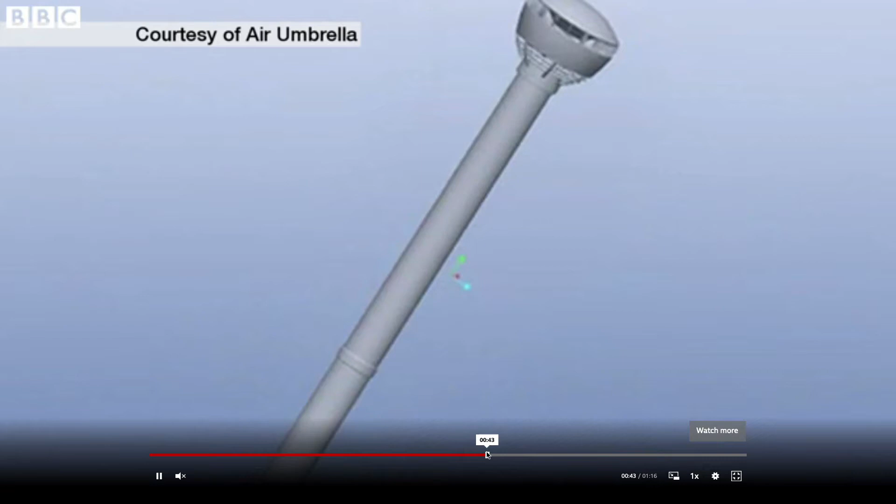Not really pipe flow, but interesting enough, I guess, related to other flows: the idea that you can make an umbrella just by having a jet of air that goes above your head and keeps all the drops of rain from hitting you on the head. I guess you have to make sure you have batteries for it to work, but I'm not sure why I put that in. I just thought it was kind of interesting at the time.

What else we got? Oh yeah, a bit of death and disaster. This was from a few years ago, I'm not sure if it says the date here. San Bruno, just near San Francisco Airport in California. Obviously all the gas supplied to us is on pipelines, talking about pipe flow. So you want to make sure those pipes actually have some integrity to them and they don't weaken.

Everyone talks now about, instead of natural gas, the hydrogen economy - the idea that you could generate hydrogen by electrolysis from wind power or PV cells generating electricity, split water into hydrogen and oxygen, use the hydrogen, burn it or use it in fuel cells. And of course, you can use all the infrastructure that's in place for natural gas, except hydrogen has a problem of embrittlement, in that it's such a small molecule that it gets into steel and tends to fracture it easily. This was an explosion in a neighborhood from a gas pipeline, which is underground, which ruptured and maybe killed a couple of people.

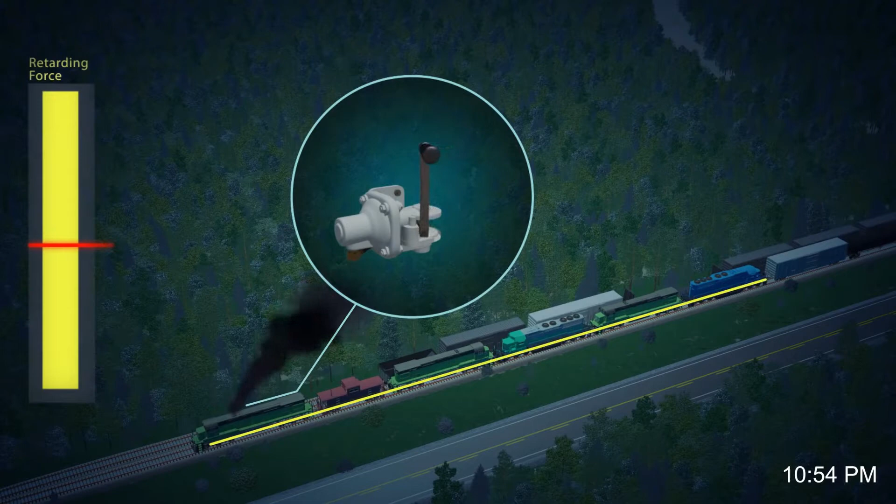You've probably heard, certainly in your lifetime, in the recent past, it was the Biden administration who killed it - the XL pipeline, which was supposed to go through Nebraska, through the Midwest. The idea was it was a big push by the Canadian government because in Western Canada they have tar sands in Western Alberta, just on the east side of the Rockies. These are kind of unconventional oils - it's like bitumen, almost like the tarmac asphalt you put on the road.

It's so thick that to get it out of the ground, typically you use what's called SAGD - steam-assisted gravity drainage. You pump in steam, you warm up these shallow sands, probably 10 or 15 or 50 meters deep, no deeper than that. The heat reduces the viscosity of the bitumen, so it flows by gravity under its own weight in the pore space. You gather it, take it out, and then refine it.

The XL pipeline was due to be able to take all of that oil down to the Gulf Coast, to refineries, through central U.S. It's relatively heavy, carbon-wise - called a dirty oil in terms of its carbon footprint. High carbon to get it out, because you have to use energy to get it out, heat up water to pump in as steam, and once you do get it out, it's quite heavy oil in terms of carbon. Methane is CH4, so 4 hydrogens to every carbon - these oils are much less.

We talked before about these oil containers, these tankers, which have flared ends, in the context of having them so that when you accelerate, the oil or fluid in it can move to the top, and it doesn't pop the cap off the top of the tank.

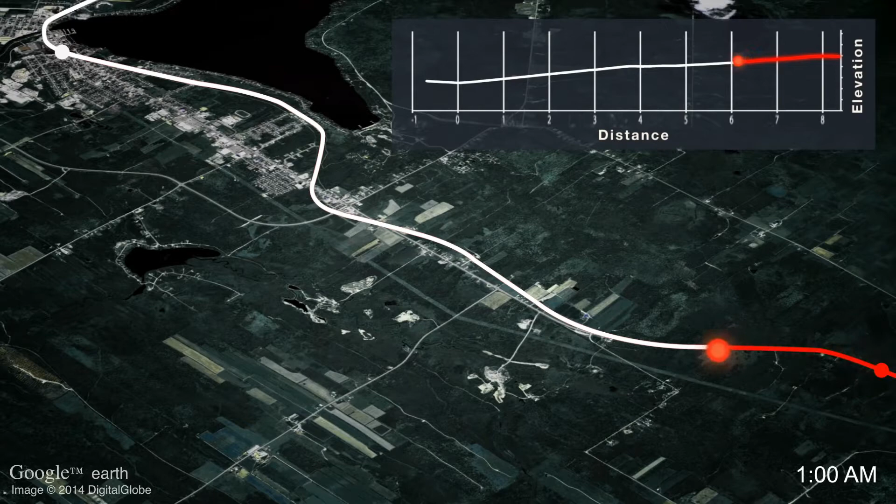The XL pipeline is about sending oil by pipeline instead of by tanker. Even though we showed exploding pipelines before, exploding pipelines are probably safer than taking oil through neighborhoods by rail.

This was a tragedy called Lac-Mégantic in Quebec. A train carrying a number of cars, basically an oil train, maybe coming from the Bakken in North Dakota or Western Canada, full of tankers, was parked outside the town of Lac-Mégantic at nighttime. It wasn't secured properly, the brakes came off, did whatever, and then it ran into the town.

It killed 47 people who were up late at night at the one bar in town or whatever, as it derailed. So the theme of our class, we're veering off it a little bit, but pipelines are what link up the country for hydrocarbons, for gas.

When you turn your stuff on, I guess this is a picture of it the next day. No, I won't replay it.

The point is that pipelines are used in everything that we do. They're in use for the stuff we have in our houses. They bring natural gas into houses and hospitals and buildings, etc. They're part of pretty much our everyday life.

They're even part of the jet lev, right? The jet lev has a pump, sits on the water, the umbilical comes up into the back of the person, and then squirts down either side. That's essentially pipe flow. And of course, the essence of pipe flow is what we talked about last time.

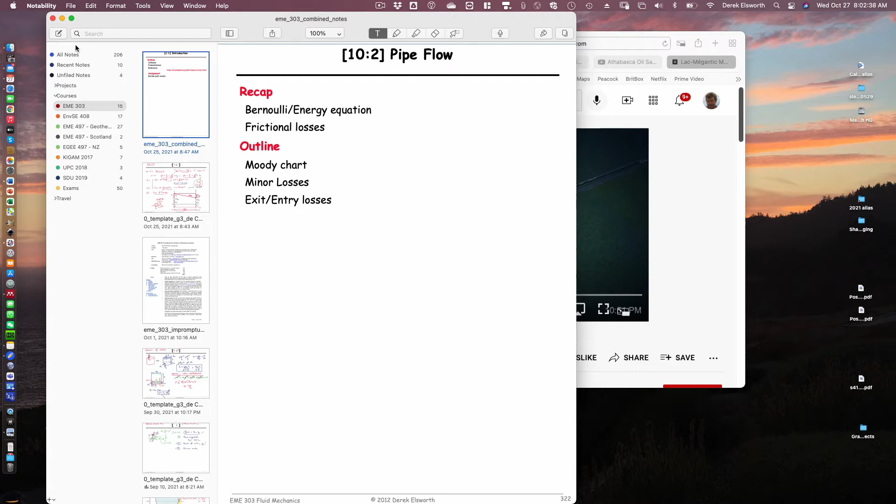So that's kind of the intro to where we are for today. Important in terms of what we're dealing with. Let me get set up here.

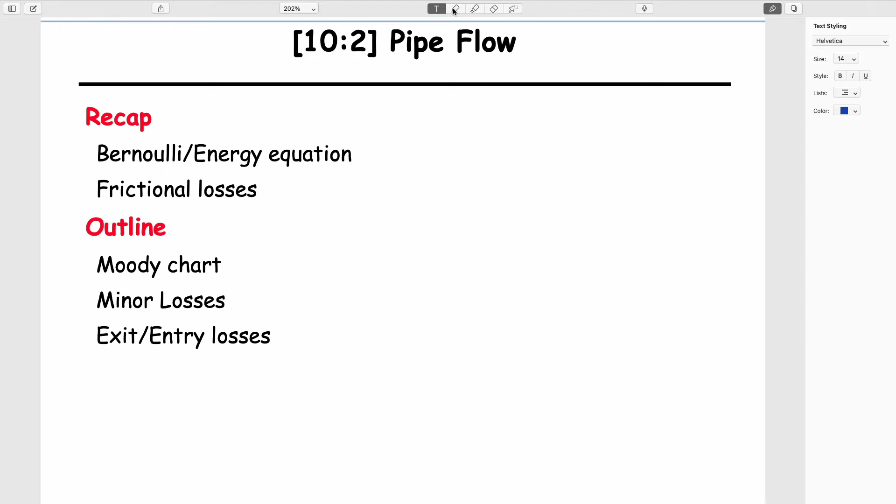So I thought we would do these things today for 10-2, since we're on schedule.

Initially, just re-discuss what we've seen many times before, the Bernoulli/energy equation. The energy equation is just the Bernoulli equation plus the pump heads for pumping and the head losses for frictional losses. We'll talk about what frictional losses are, we've already talked about them a little bit.

And then talk about these three things: the Moody chart, which is nothing other than the chart we alluded to before, which is the essence of pipe flow. We'll try to get to that and talk about minor losses, which are losses within fittings, going around bends, and entry and exit losses.

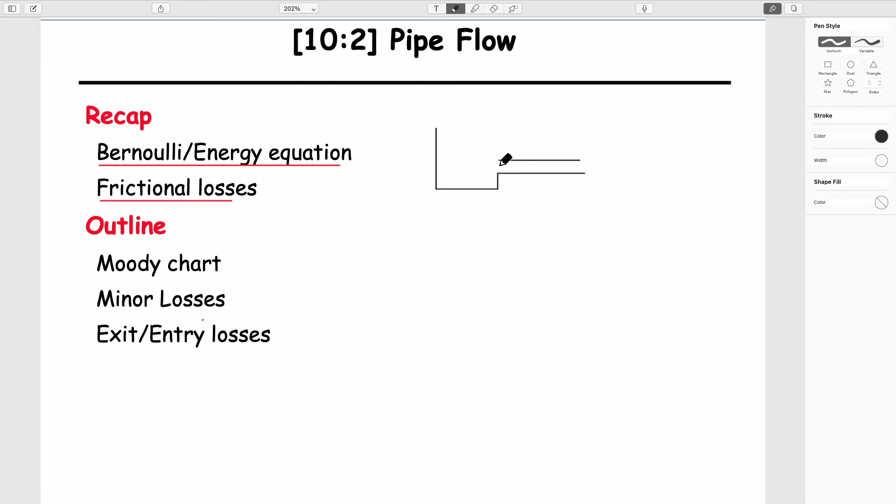But I think we'll spend most of our time talking about rationalizing the energy equation. I'm not sure, perhaps maybe I should draw something. So if you took a kind of fake geometry that we might want to play around with, that involves pipe flow between two tanks, it looks something like this.

And those two tanks maybe are at different water elevations. Not supposed to be sloping, right? And I guess it should connect up at the top. So this would be a point here, and then this would be a point here.

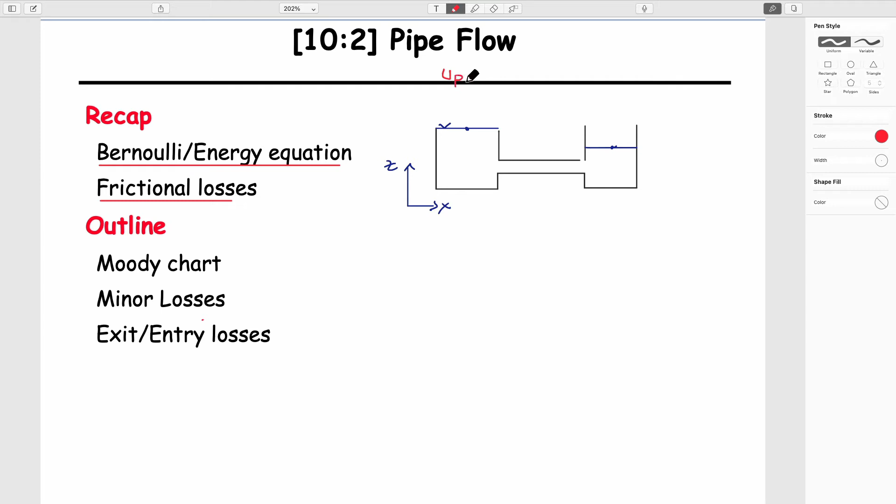We can draw our coordinate system in it. Z is always positive upwards. And I guess we could define an expression which goes from the upstream side — so this is upstream, obviously — to downstream, because of the water elevations.

And the expression for that would be something like this, you've seen it many times: elevation head, pressure head, velocity head, the pump head on the left-hand side is equal to Z2 plus P2 over unit weight of the fluid plus velocity squared 2 over 2g.

And I suppose we could add on also the sum of the head losses. Just to remind ourselves, we've always defined pump heads in terms of something that looks like this.

It's equal to — probably unfortunate units, but this is rate of doing work, so this is power divided by density times volumetric flow times gravity. So these two terms together would be what we've called in the past mass flow rate, right? Density times volumetric flow rate.

And we've also, although we've never really derived it, but we'll get there today, talked about these head losses. We can talk about what we'll call major losses, which are defined by some parameter — a friction factor — times length of the pipe over its diameter, times the velocity head.

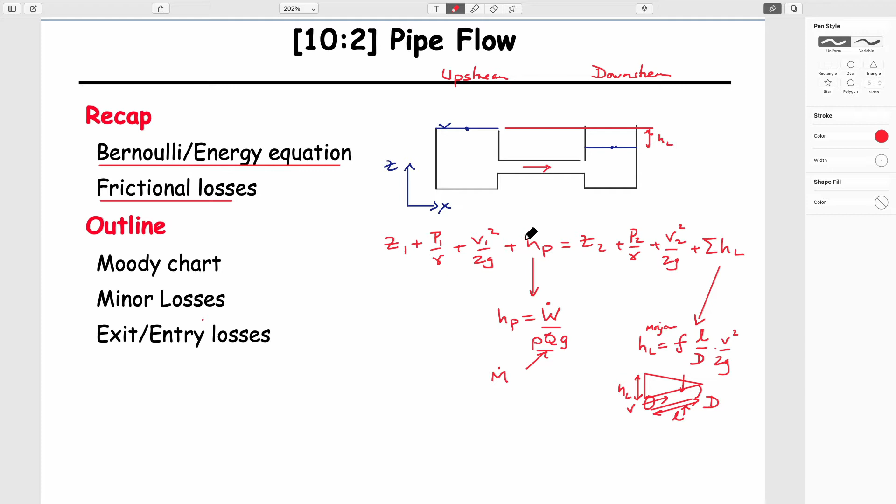It doesn't have this term on it, because it's not that term. It's actually the velocity that would be in this pipe in which the loss occurs. And clearly, if you go across from here, this would also be the head loss between upstream and downstream, physically what it is. And so this is what we'll call the major losses.

Just to finish it off, let's talk about the minor losses. This is a summation of all of them. The minor losses we've already seen once before: it's this coefficient between 0 and 1, times v squared over 2g, again the velocity within the fitting. This would be for things like bends in pipes, with some defined velocity within the system. So these are the two losses that we have, and they'll always look something like this.

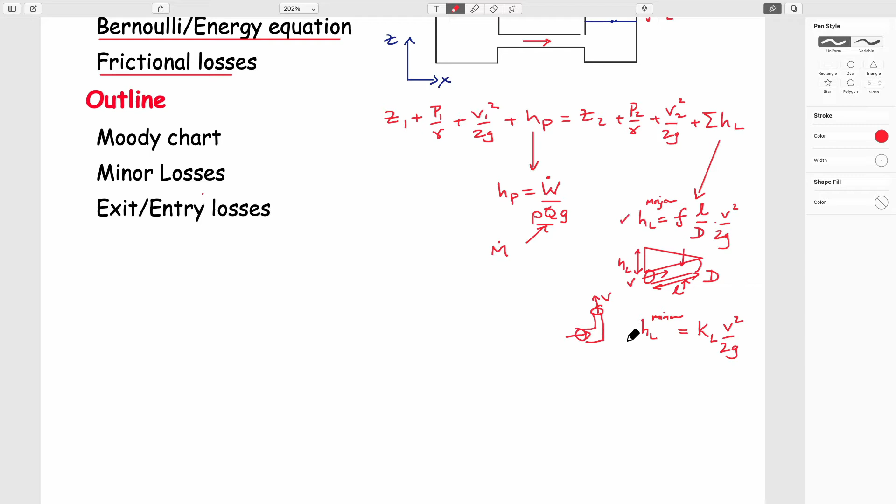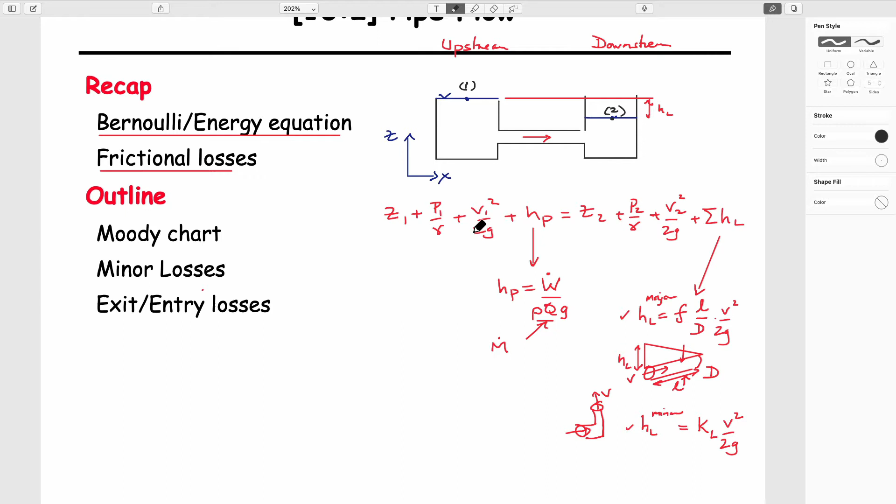So when we're solving this, I guess what we could do is we could typically write this easily as 1 and 2. Those would be our locations. And so if we deal with those, the differences in elevations wouldn't cancel out.

But these would be at atmospheric pressures, so this would be 0, and this would be 0. These would be big tanks, so this would be 0, and this would be 0. And if there's no pump in our system, so this is 0, then the difference between the head losses is just going to be Z1 minus Z2 equals sum of HL.

So I kind of jumped to that by drawing this, but that's exactly what this is, right? That doesn't help us very much, because it just tells us that the head loss is equal to the difference in elevation. So if we wanted to figure out exactly what the head loss was within the system, instead we could write the behavior at each of these two points here, and we could call those 3 and 4.

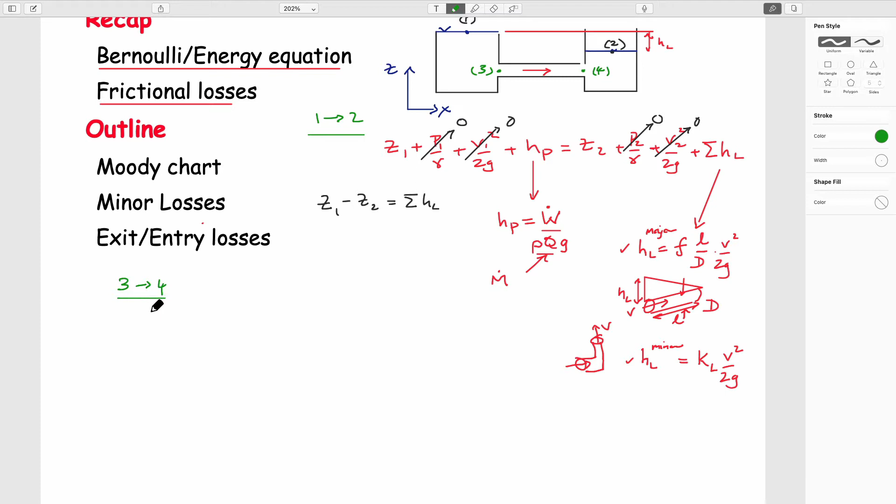So this one was between 1 to 2. Now if we write it 3 to 4, then I guess I could write this equation out. Well, why not? I can do it much better than that. If you're rushing to write this, I guess it removes it from there, but I guess you don't need it.

It's recorded somehow, so we could look at what these individual components are without me now writing it. I just need to change it slightly for the fact that now the suffixes wouldn't be 1, 1, 1, and 2, 2, 2, so you see where we're going with this, hopefully. They would be, upstream would be 3, and downstream would be 4. Yes, I can tidy it up again and then talk about what these individual components would be.

So what do we have now? Elevations of these two, well, they're kind of on the same level, so elevations would be the same. So this and this would drop out, not because they're 0, but because they're the same as each other. The velocities, if it's the same diameter pipe at both ends, then these would also cancel out, not because they're 0, but because they're the same as each other.

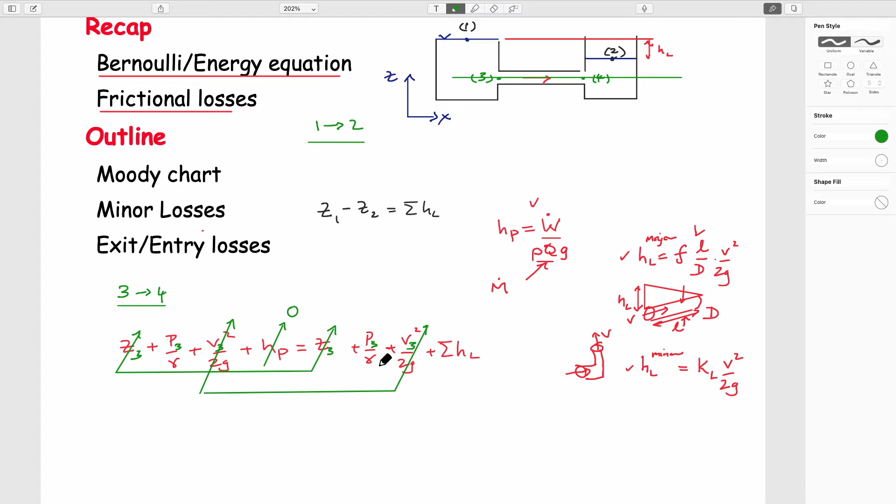We're assuming that there's no pump in the system, so that's 0. And now the differences between them would be that—okay, so you didn't correct me, but of course it's wrong. These should be 4s, right?

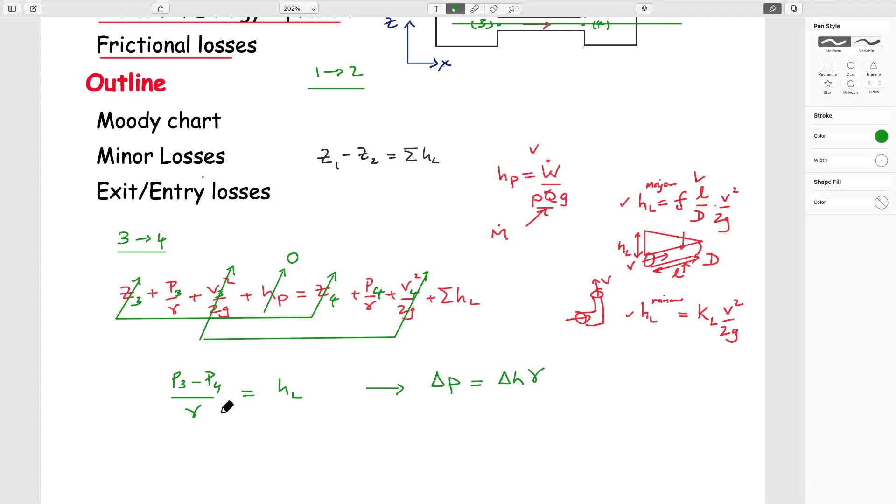And so now, P3 minus P4 over unit weight is equal to the head loss. We kind of know that from our unit conversions that the change in pressure is equal to the change in head multiplied by unit weight. We can just get that from this: delta P, delta H, this is a delta. And so physically, really, that's what it is.

If we draw the pressure as an elevation, a height of water that would rise up in a pipe above this, then this is really going from this magnitude to this magnitude downstream, and this is just the head loss. And so we can always define the head losses in terms of that, and that's the typical system that we'll deal with.

You'll note, of course, that if we have Bernoulli and the head loss is 0, then there can't be a drop between these, right? We can't sustain it. You can think of that in terms of: if the viscous losses on the pipe are 0, that's like the pipe being really, really big, which is like the tank being really, really big. This, instead of being a pipe, is just a continuation of the tank.

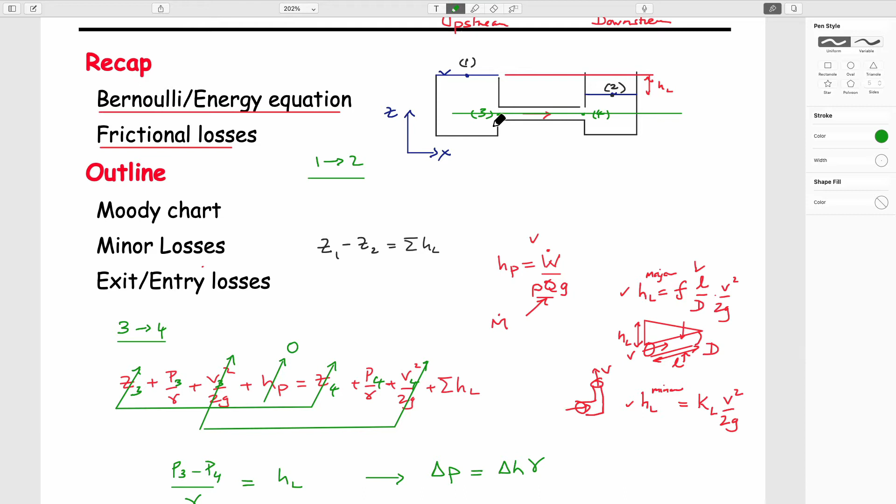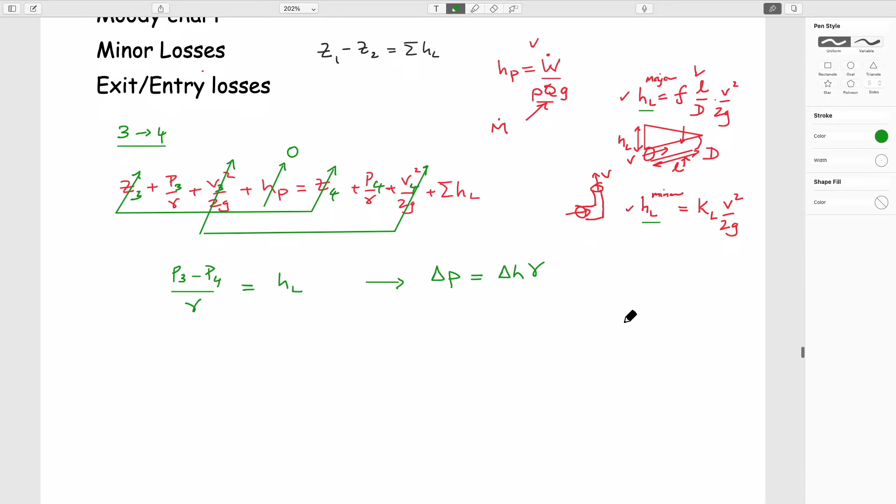And of course, in a single tank, you can't have 2 different elevations unless it's accelerating somehow. So Bernoulli wouldn't allow these elevations to be different, because the essence of pipe flow is that we're losing some energy as it flows from upstream to downstream, and it's these frictional losses that occur along the way. So the essence of pipe flow is being able to figure out exactly what these magnitudes of head losses are. We should spend some time figuring out exactly what that means.

The easiest way to do that is to think about what we didn't really do last week, but what was on the cards for last week, which was dimensional analysis. It's dimensional analysis, but it uses dimensionless coefficients.

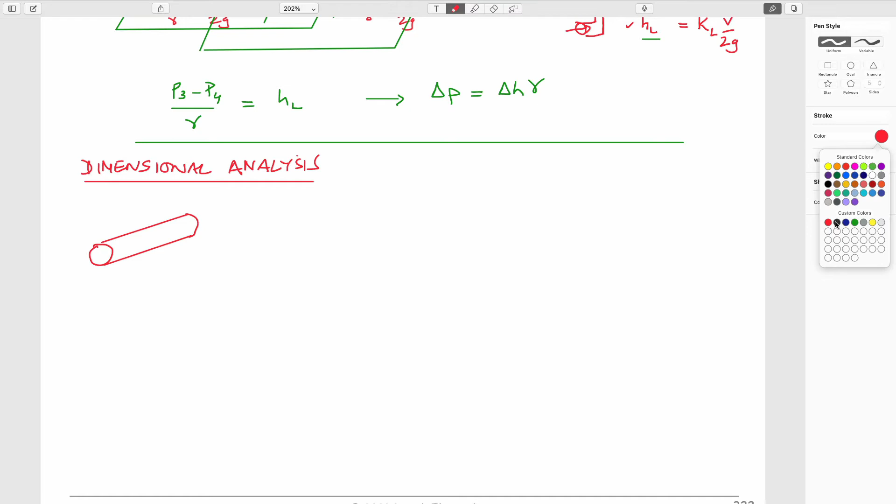This just says that what we can do is we can analyze, say, flow within a pipe. So our flow within a pipe would be defined in terms of the features of that pipe that describe the flow. We can imagine the features would be the velocity at which the fluid flows, the pressure drop that occurs along the pipe, delta P, the length, and the diameter, the internal diameter, since we're interested in flow.

We said last time that we might be interested in some roughness. So roughness, let me draw it larger: roughness would be epsilon, the magnitude of this, which equals roughness, Greek E, in other words, roughness. And I guess a couple of different properties of the fluid, which would be the density and the viscosity.

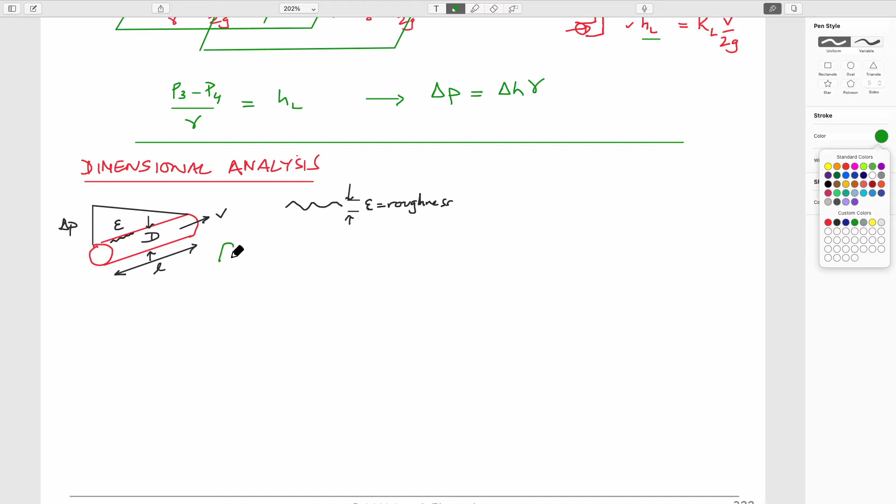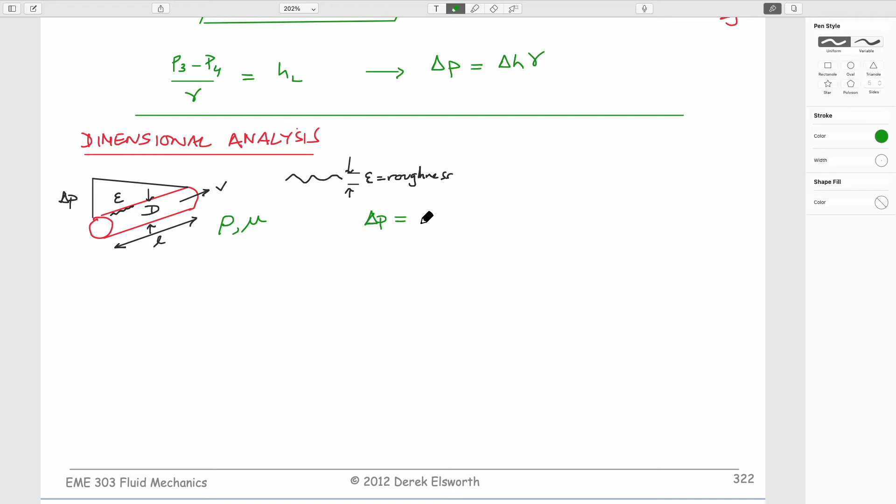So what we could write from this is that the pressure drop that we have in the system is some friction factor, a constant function of the density, the viscosity, the velocity, the length, the diameter, and the roughness. So this is 1, 2, 3, 4, 5, 6, 7. This gives us 7 terms.

We know that from Buckingham pi, the number of dimensionless terms is equal to, I think we call it, k minus n. K are the number of terms, which are 7 in this particular case. N is the number of mass, length, or time dimensions that are mentioned. I guess this could also be temperature, but we don't have temperature in this, so we won't worry about that. Mass: density is mass per unit volume, so mass is certainly in there. Length, certainly in there. And velocity is meters per second, so each of these 3 are represented. So this would be equal to 7 minus 3, which is equal to 4.

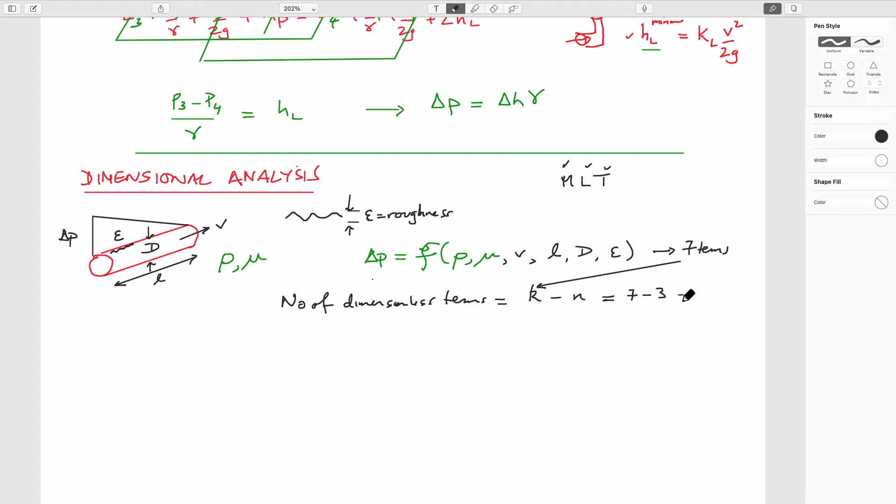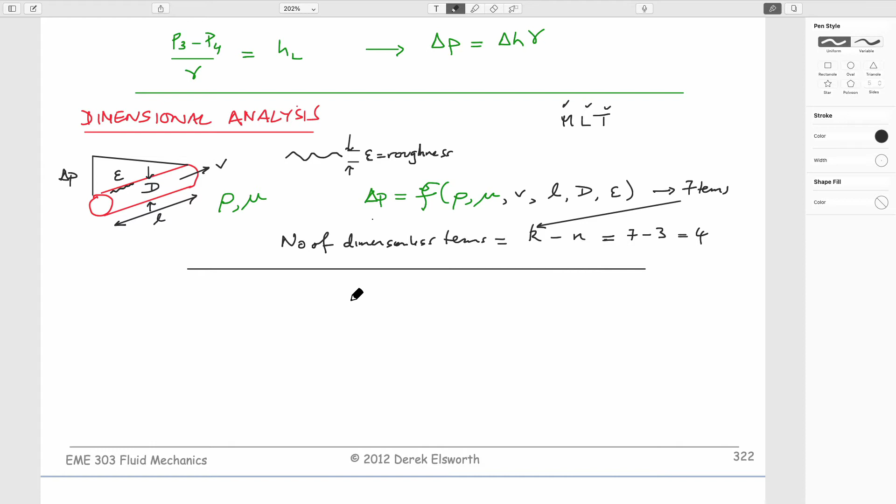So maybe it could be a scaled model, or certainly we could use a real pipe in our calculations because it's not so big. Kinematically, the flow regime in that pipe has to be identical to the flow regime.

It's not so obvious within a pipe, but we use this idea that if you flow around a sphere or a cylinder, if you flow very slowly, it's kind of a creeping flow that hugs the cylinder. If you flow much quicker, it's this flow that breaks off in the downstream portion, and you get lots of vortices. These are the vortices that give the Tacoma Narrows Bridge shedding from the top of the deck and then the bottom of the deck. Alternately, it gives it this oomph.

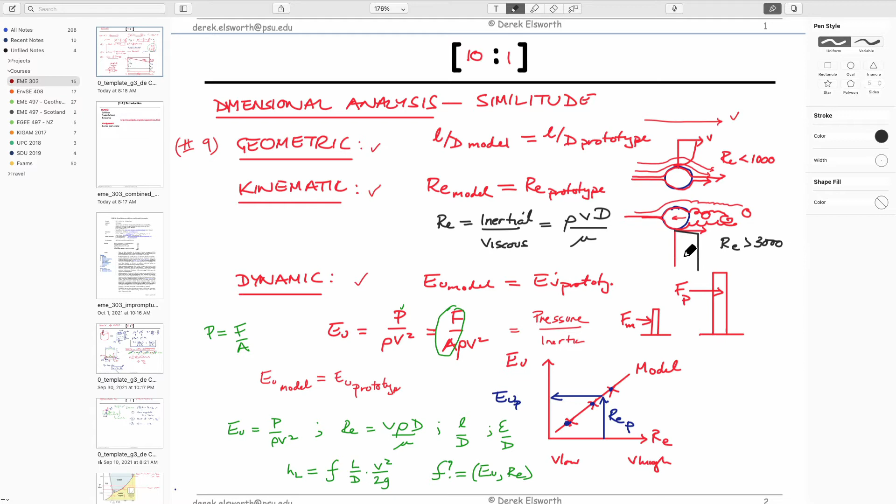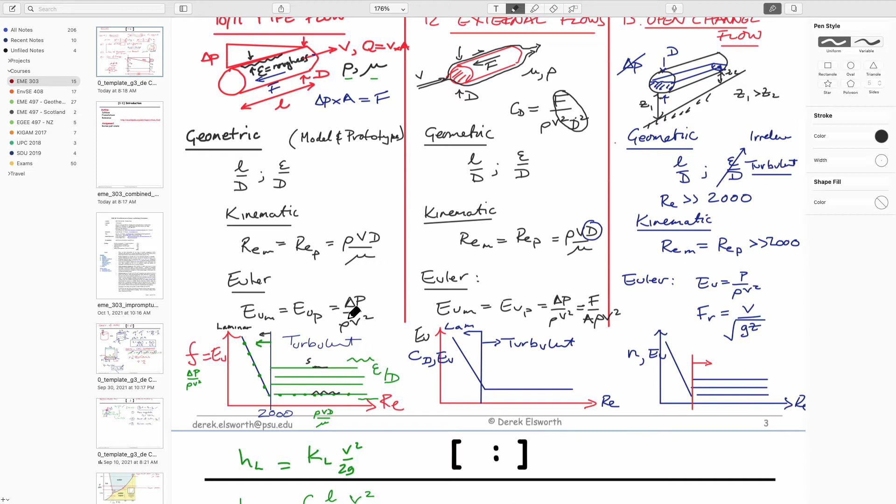So we want the flow regime to look exactly right, and that's done by making the Reynolds numbers equivalent. And then if we do that, we can use the Euler number, which says something about the forces that are applied on that structure. And so what we can do here is we can do that exactly, and we can look at those requirements. So in terms of geometric similitude...

Let's write them all down first: geometric similitude, kinematic similitude, and dynamic similitude.

And just remember what these are. Kinematic similitude means the flow regime is the same in the model and the prototype. Dynamic similitude means that the forces applied to the model and the prototype are the same.

And so we know that for dynamic similitude, we want the Euler numbers to be the same. And the Euler number we define as a change in pressure, a pressure drop, divided by a density and a velocity squared. Could be a half in here for the half v squared, but we don't need it. And this would be defining the Euler number.

We know that for kinematic similitude, we require the Reynolds numbers to be the same. So the Reynolds number would be a velocity, a density, and a characteristic dimension. That characteristic dimension could be the roughness, it could be the diameter, it could be the length. Those are all the choices we have, but the diameter is the most reasonable one for the things that we're looking at, and divided through by the viscosity.

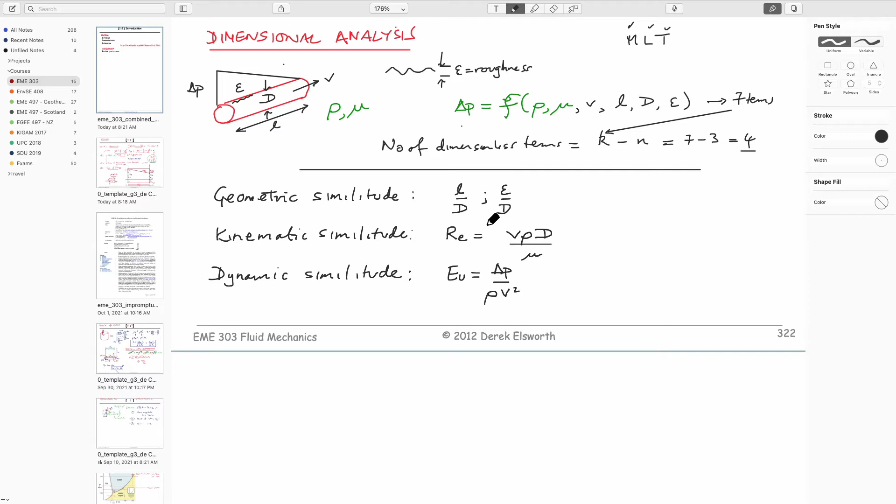So this is the length to diameter ratio, this is the relative roughness, and so if you see in these terms here, this term comes in. So we can do that by inspection. You could do it by a formal method, like using Buckingham pi, starting from nothing and getting it. And so that allows us to be able to define what these terms are.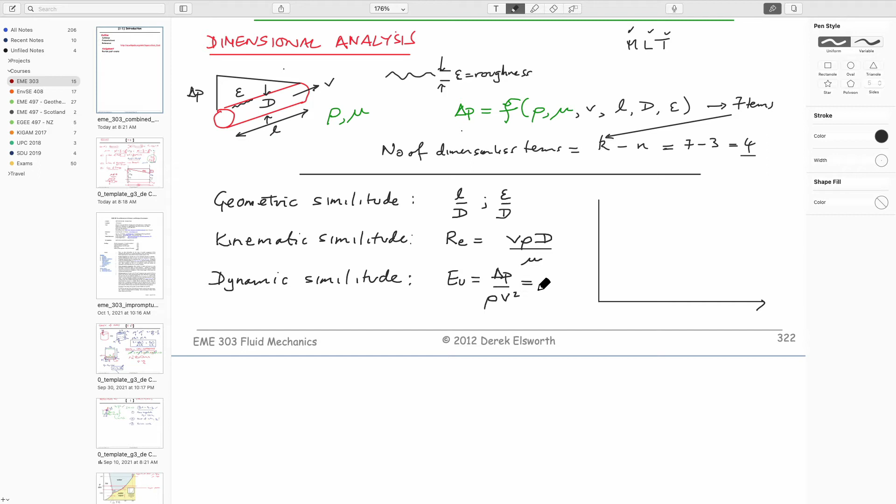And so now, if we do some experiments, and so I suppose what we could do, I can probably get it in here. This will actually be equal to the friction factor. So we've talked about that here, this term here.

And so if we plot Euler number, which is equal to a pressure drop divided by density of the fluid times v squared, and if we plot a Reynolds number, which is equal to the flow velocity, the density, the length, the diameter of pipe divided through by its viscosity, then what we could do is we could do some tests on a single pipe, of some length and diameter.

And that had some roughness attached to it, epsilon. And we could apply a pressure drop to the upstream, going downstream, and we could measure the flow velocity out of here. And so that would give us a value of a pressure drop.

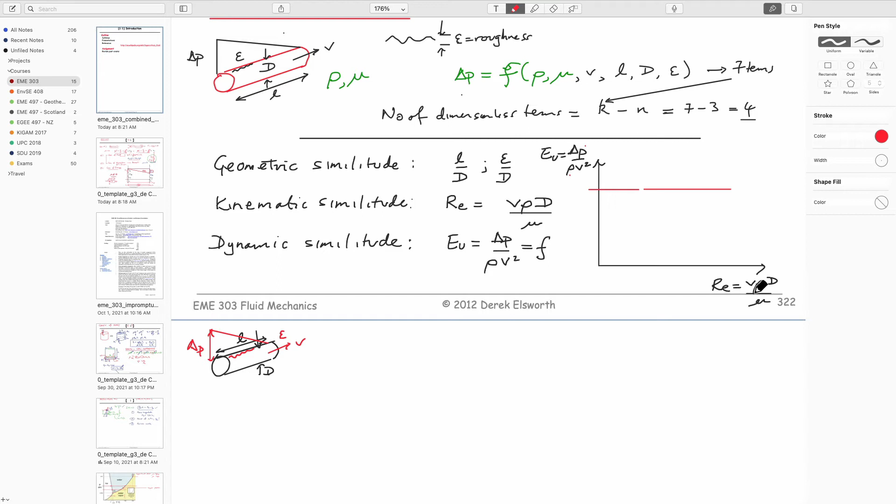It would be water, so we'd have a density. We'd measure the velocity, and so we could have a number for this that would come out of our experiment. We'd measure a velocity, we'd know the density, we know the diameter of our pipe, we know the viscosity of water, 10 to the minus 3 Pascal seconds, so we'd have a Reynolds number as well.

So from each of these, we'd have a point. Maybe what we do is we increase the pressure to 2 times delta P, and you get this goes to 2 times the velocity. You can do the same for this. We've doubled the pressure, the velocity's doubled, but it's squared, so it's quartered. So there's a factor of 4. We'd expect this number to be lower, and the velocity is increased by 2-fold, so we'd expect this number to be bigger. We'd end up with a value, and the point is that we'd end up with a curve that links these two together.

We've said already that this Euler number is equal to what we've called a friction factor, which turns up in this expression here. So we've started basically drawing a Moody chart. The first curve we've got 2 points on this - we've got 1 point here, and we've got 1 point here, and we've got the beginnings of a curve that define that. That's the mechanism by how we'd figure out exactly what these friction factors are.

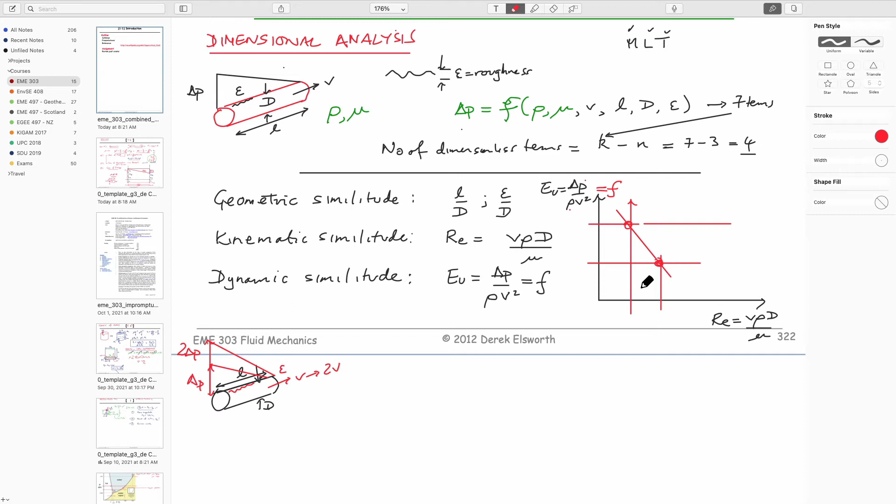We do some experiments by typically taking some pipes - this is the same pipe, but we're just running flow at different velocities - and we'd find out that we'd get some behavior. Furthermore, if we kept on increasing the pressure, we'd find at some stage that the Euler number would keep on going down, and the Reynolds number would go up, but they no longer would be on a straight line. We'd end up finding that we'd get some experiments that started looking like, going off like this.

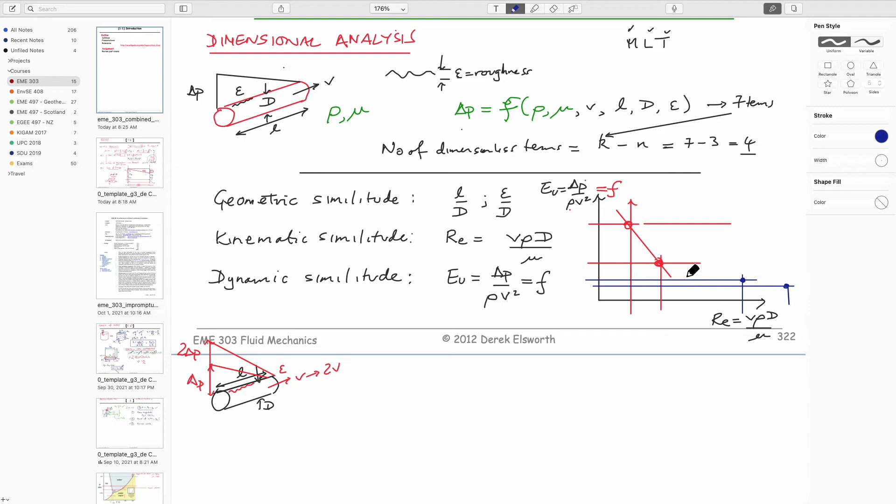And that kind of defines two different regimes. The two different regimes are manifest in the fact that if we had a smooth pipe, then this curve goes into this one. This is very slow flow rates, increasing flow rates, then it goes down on this trajectory. The most important thing about this is that you see two regimes, and these two regimes break at a Reynolds number relative to the diameter of the pipe of about 2000. It's this number here, and that defines the separation between what we'll call laminar flow and the evolution of turbulent flow.

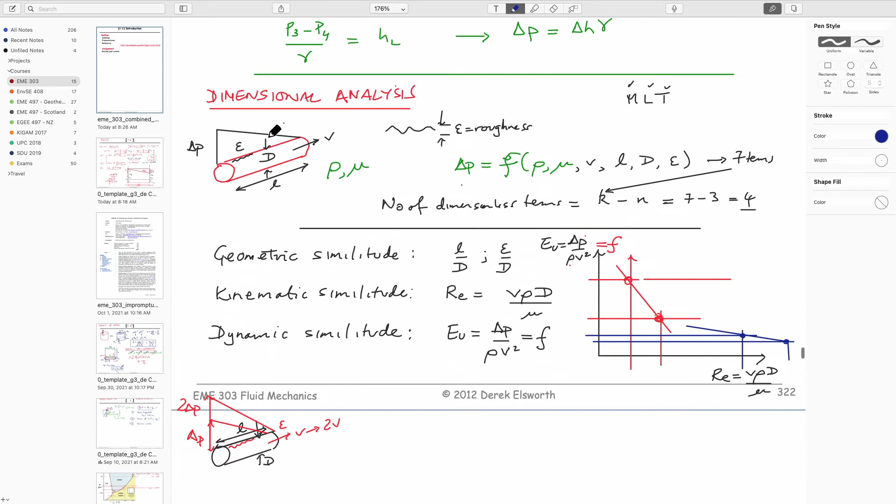They're fundamentally different, and probably easier to sketch on a diagram like this. If we sketch them on this diagram, then in the laminar regime - if this is Reynolds number and this is friction factor, which is equal to Euler number - then in the laminar regime, which makes a break at about 2000, the friction factor that we have here is, for a circular pipe anyway, equal to 64 over the Reynolds number. So it varies as a function of the Reynolds number.

But for turbulent flow, the behavior is independent of Reynolds number. So the friction factor is constant for a given roughness. These are values of relative roughness - this would be a rough inside, this would be a very smooth inside. The key issue is that in this turbulent regime, it's not a function of Reynolds number anymore. That's important to you because in most of the calculations that you'll do, you'll be measuring a head drop within the system.

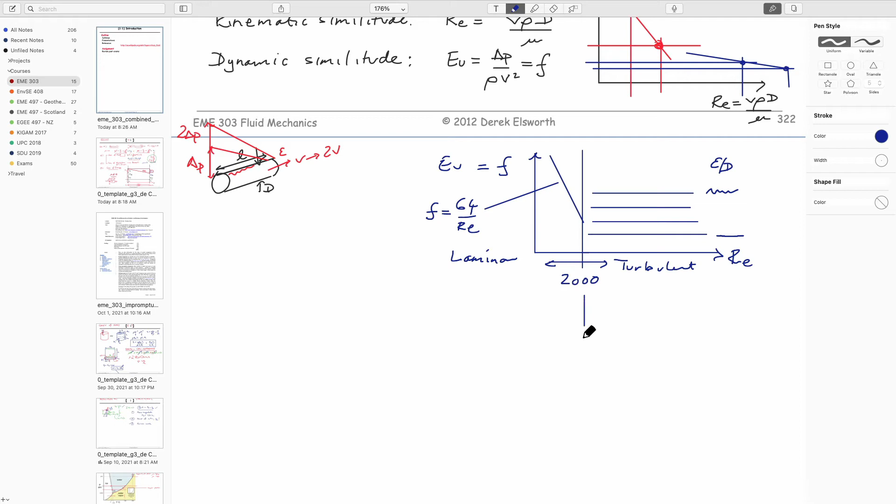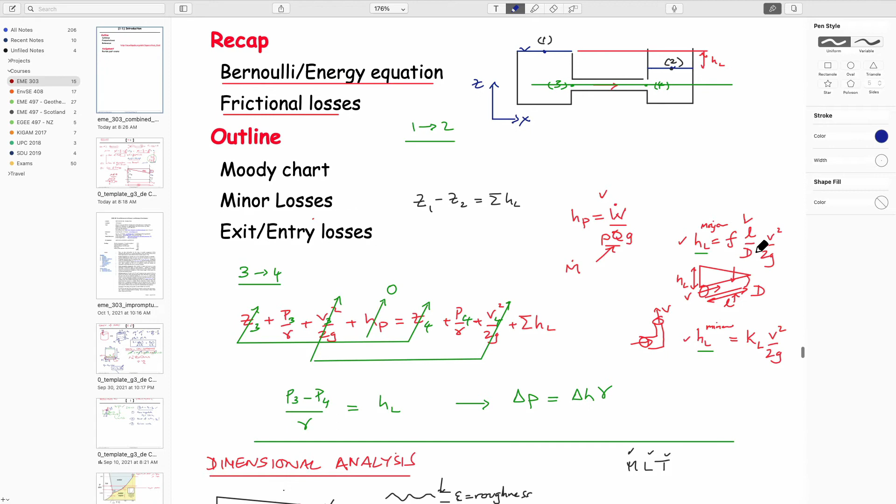Once you cancel all the terms out of here, you have a head drop equal to this. So if we write this out, the drop in head loss is equal to a friction factor times length over diameter, which we can define, times v squared over 2g - this is the velocity within the pipe. So if we want to solve this, typically what we'd like to solve is: if you know what the head drop is in our system, because you know the upstream level and the downstream level, we'd want to know what the velocity is.

So if you want to do that in the turbulent regime, then we know that F equals constant, right? Because these lines are horizontal. So friction factor doesn't change with Reynolds number. It's not a function - I guess you could also write that as friction factor is not a function of Reynolds number, which is the important feature.

Then if we want to solve this, we just rearrange it as v squared equals HL times whatever these other terms are. I'll do it this once: D over L, it would be 2G, and I guess friction factor over here. And so if you want to solve it, you take the square root of both sides, and you end up with a velocity.

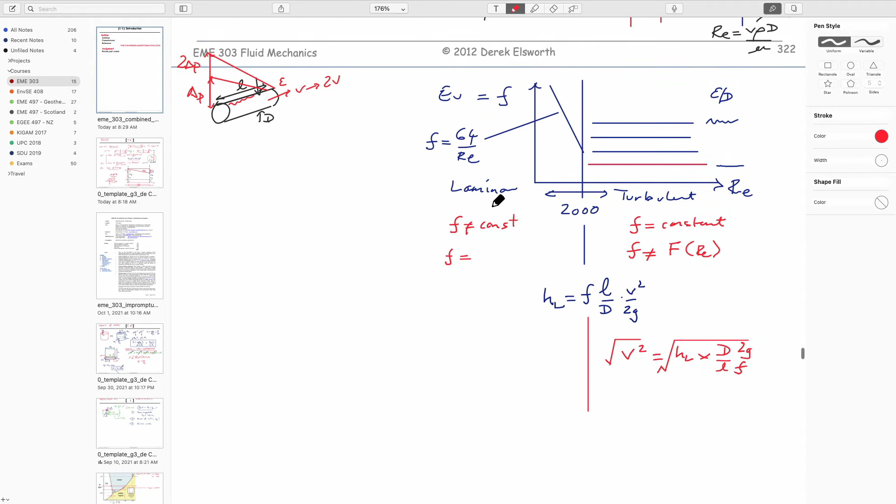The friction factor is a function of 1 over Reynolds number. For a circular pipe, it's equal to 64 over Reynolds number. And of course, Reynolds number has velocity in it. So the friction factor is going to be equal to 64 over Reynolds number, which is equal to 64 over density, diameter, velocity times viscosity.

And so now, when you substitute this expression into here, you will end up with an expression which gives you friction factor has velocity on the bottom, velocity and velocity squared. One of them will cancel out, and you'll just be left with velocity on the top. And so you'll end up solving it, and if you rearrange it, you'll end up with velocity equal to some constant times HL. Here you had velocity squared equal to a constant times HL. Here you have velocity as a constant times HL. So they behave fundamentally differently.

So for your purposes, the important thing about these two regimes is that you solve them slightly differently, and there's a different dependence on velocity in each of the regimes. Pretty straightforward.

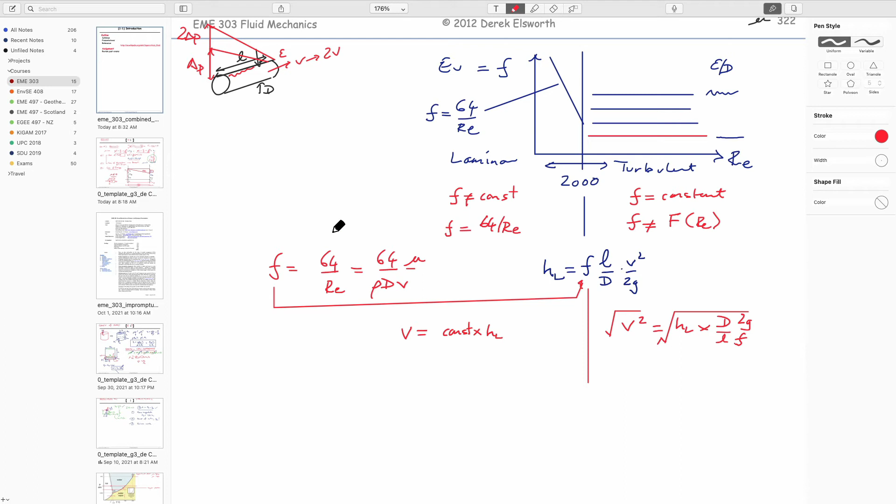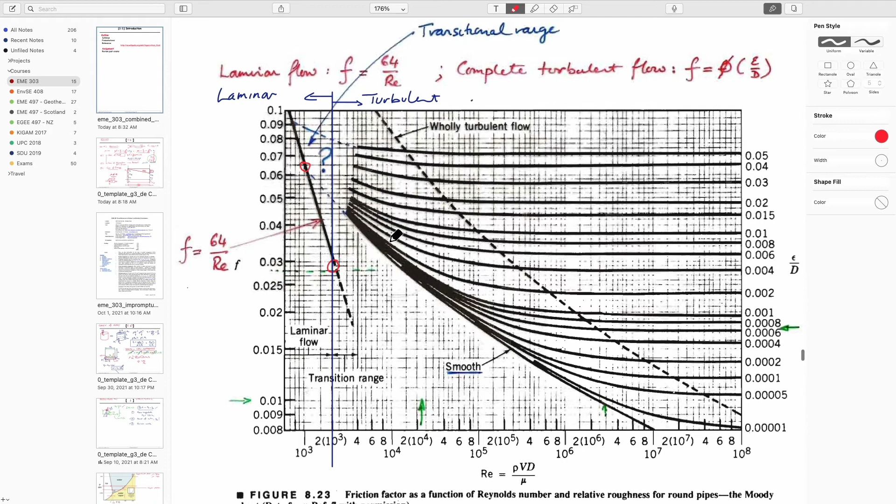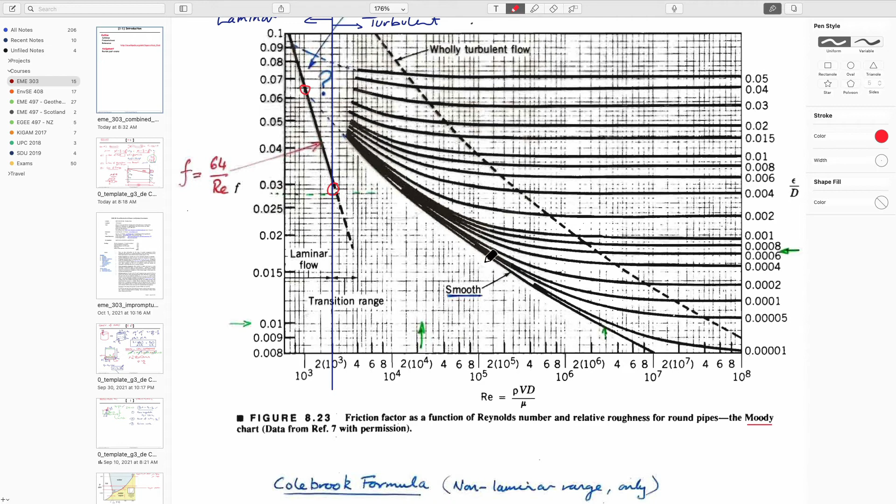So these are embodied then, and we'll go through some examples. We've got a week and a half still to spend on this, so we'll go through many examples. But this figure is the one that we'll use, the so-called Moody chart. Moody, I guess you see it down here. Interesting name. And you see that these are functions of the relative roughness: large relative roughness here, very smooth here. A smooth pipe is this boundary here between them.

And I guess you can see that it's not really binary. You don't go suddenly from laminar at 2000 to turbulent as you cross that boundary. There's kind of a transition regime. And there's a wholly turbulent flow where the friction factor is not a function of Reynolds number and is only a function of roughness. And you have wholly laminar flow where the friction factor is not a function of roughness at all. There's nothing here that says anything about roughness. So if you have your golf ball moving with fluid flow around it in a laminar regime, the drag on that golf ball is not a function of the dimpling on it. It's only a function of the dimpling when you get to this regime over here.

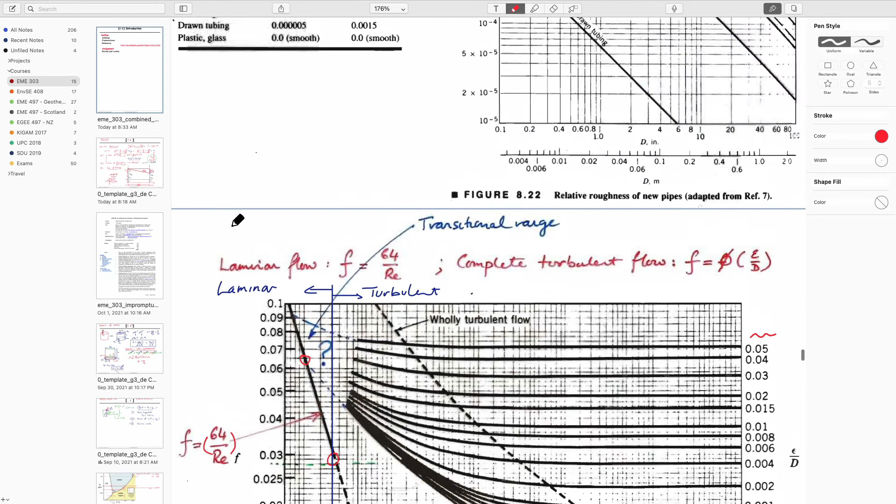So that's kind of it. So I suppose we've jumped the gun a little bit in that we've pulled out of a hat the fact that this friction factor, at least in the laminar regime, is equal to 64 over Reynolds number. And that's kind of been a magic thing that we've done. It's not particularly magic, is it? Of course, you could do that by running experiments, and you could see exactly what the dependency worked out to be. But we will maybe have a go at looking at it slightly differently.

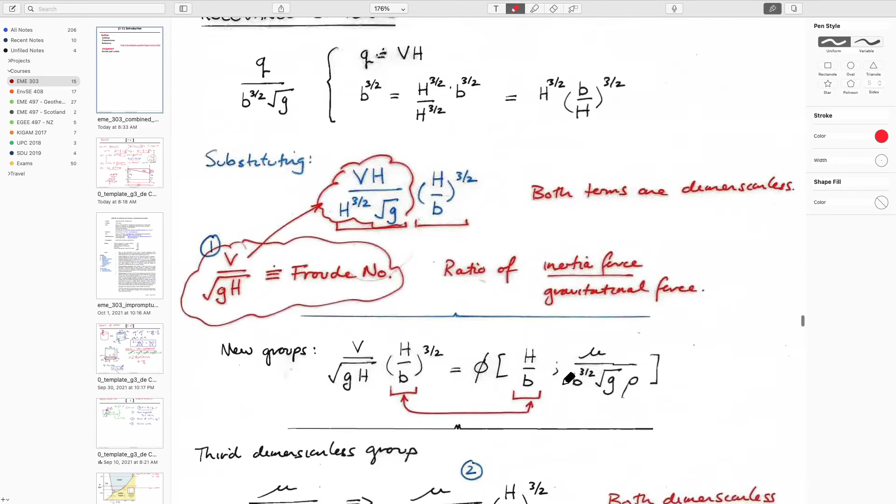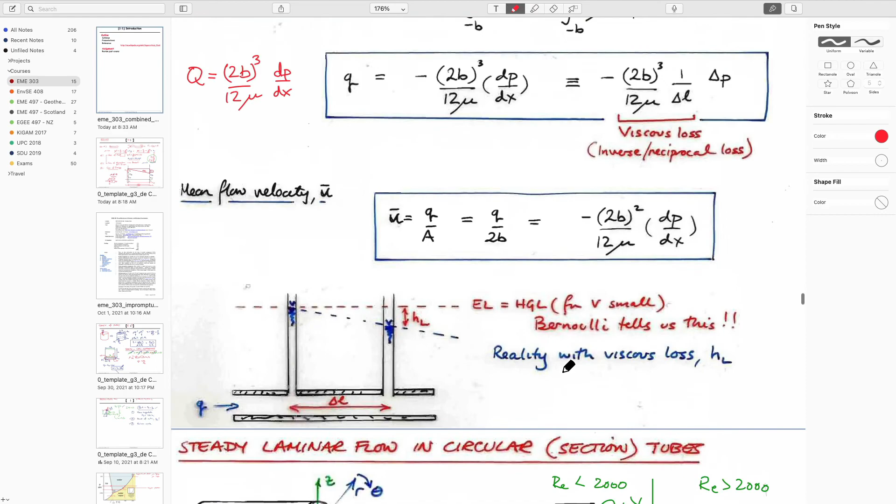If I can go back, don't mean to give you whiplash. Buckingham Pi. The last stuff that we talked about in week 8, before we talked about dimensional analysis, was that we talked about these complicated equations. So if we take the momentum equation, resolve it in 3 directions, we get 3 directions for F equals ma in x, y, and z, and conservation of mass. And these are differential equations. They include the effect of viscosity.

And what we could do is we could solve these in little differential cubes, in the kind of examples we looked at for the lighthouse getting washed over. And we'd solve them because in each of these individual differential cubes, there would be a velocity in x, y, and z, and a pressure. And we have exactly 1, 2, 3 equations, and 4. So we have 4 equations that we can use to solve it.

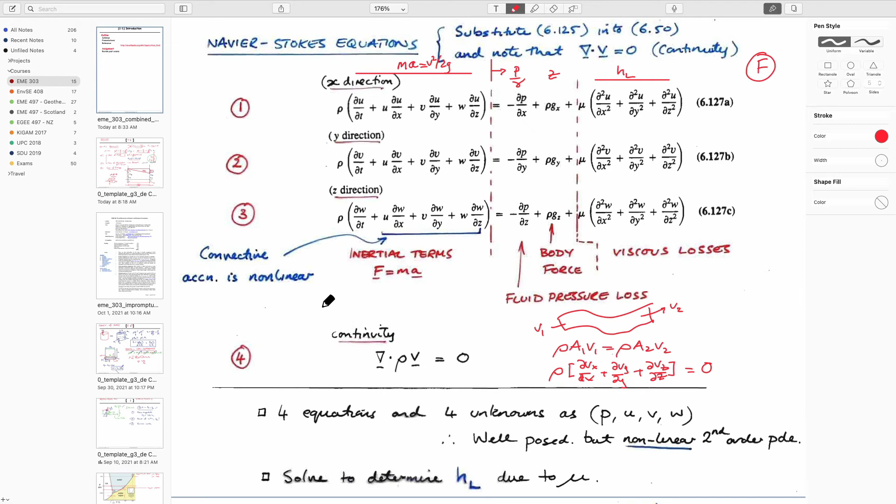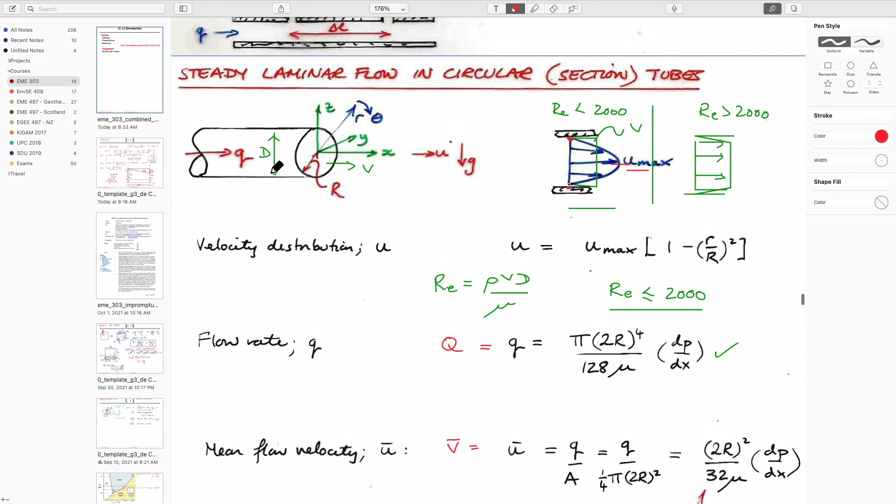The alternative is that we could solve these equations in a very simple geometry, such as flow between two parallel plates to represent a duct, or we could modify them to solve for flow within a pipe, where we apply the appropriate boundary conditions. The boundary conditions are that the flow velocity at the boundary is 0, and it varies in some form across the section of the pipe.

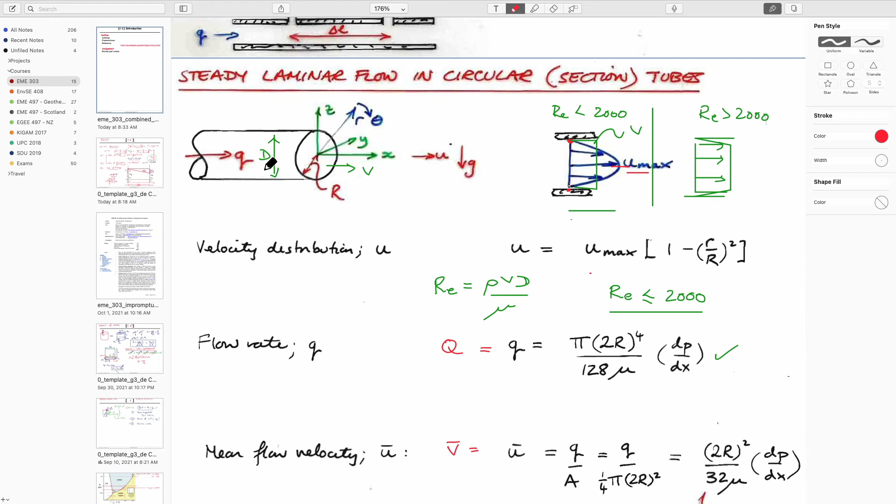And if we solve them, we'd end up solving one of the momentum equations in the x direction. That's the only one we're left with. And we'd solve a continuity equation for mass rate in equals mass rate out. It ends up being one equation. And as a result, we'd end up with an expression that would look something like this.

We didn't really go through it, but it says that the average velocity is found if we take this parabolic distribution and integrate it across the section to see what the area is, then redistribute it as an average value - this overbar is the average value. It's a function of the diameter squared, the pressure drop along the length, and the viscosity. So this is kind of a standard result that we could use to define the magnitude of that.

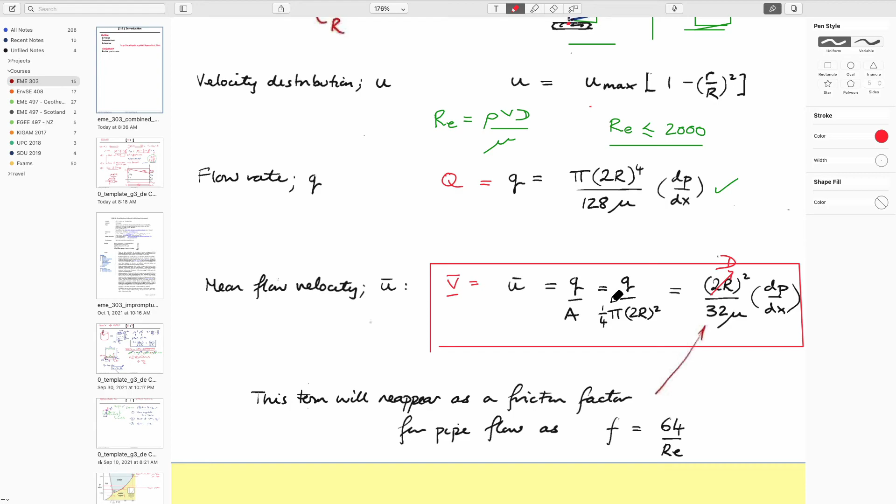So let's take that and go back to where we were, if I can find out where we were. I wish I could put bookmarks in this somehow, but I'm not smart enough to work that out.

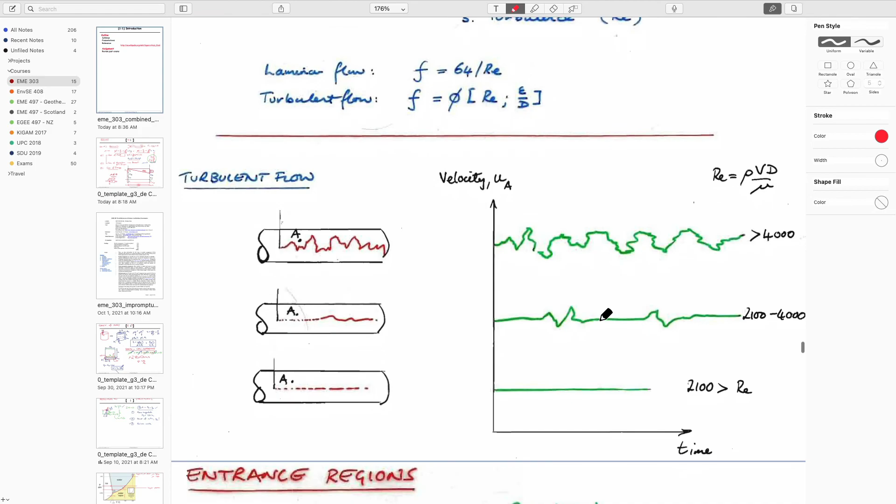So we've said before that this is the expression that defines the friction factor, so let's derive that - it's a relatively simple derivation. We said that the average velocity is equal to diameter of the pipe squared divided by 32 times the viscosity of the fluid, times dp/dx, and I guess this would be L, the length of our pipe. This is the geometry we're looking at - no different to what we've already discussed. This is a velocity, this is a length, this is a diameter.

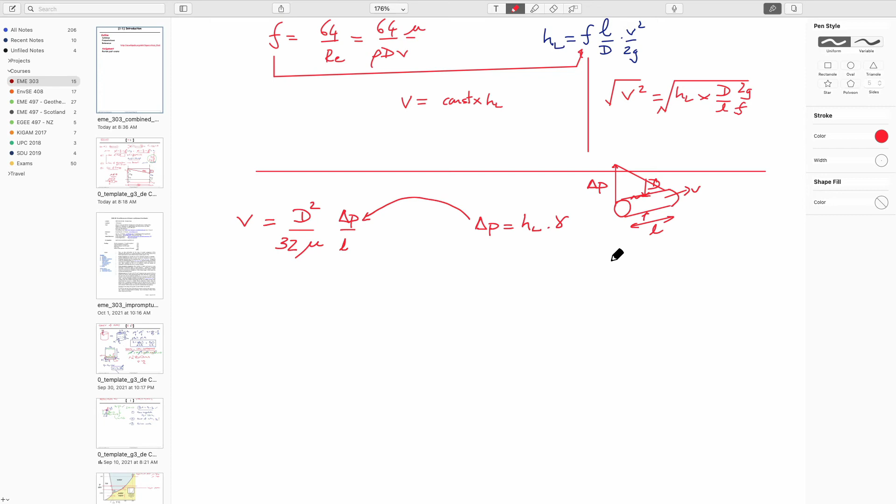We said that for laminar flow, the roughness doesn't matter, so we don't have to worry about that. We could also utilize the fact that this pressure drop we're applying, delta P, is equal to HL times unit weight of fluid. So what we could do is substitute this in. And then we know our standard result is HL equals the friction factor - if we just take it from down here, this term here. We didn't derive it, but this is the reality.

V squared over 2G - this again, just to emphasize, is the velocity in the pipe. So I guess we could rearrange that in some way. Let's rearrange this, so this is going to be HL, and we could write this as velocity. Let's see if I can do this without screwing up.

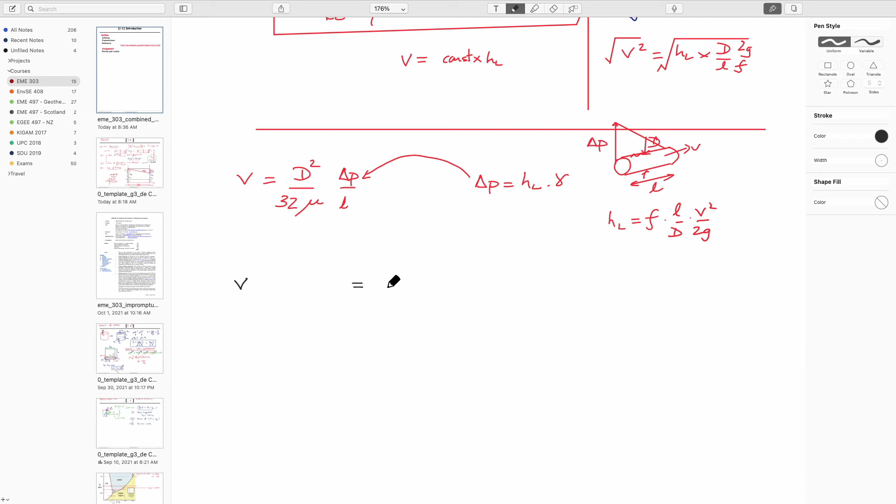HL, then this would be 32 mu, it would be length, it would be d squared, it would be delta P over here. I guess this is unit weight, which is rho g - this term here. Is that about right? Okay, so what else can we do? We want to get it into this form. So what we could do is multiply both sides by V.

And then I could try and take out the components that I think are useful. So if this is the case, then V squared over 2G - I could use L over D, so I'm not... whoops, I'll do it here.

If I do this, 10.1, yeah. We watched this, and so we spent some time looking at this.

We watched this, and so we spent some time looking at this. This is the idea that we have flow in a pipe. So this would be laminar flow, where it's really just like a pack of cards being skipped across each other.

Every laminae of fluid is skidding past itself parallel to each other. And as you increase the velocity of flow, this laminar flow ceases to be just skipping over each other, but it has some eddies that develop.

The manifestation of those eddies are across the full length of the pipe. They would be everywhere. You just see their manifestation in the middle because that's the only place where the dye is. But if you move the source of the dye closer to the edge, you'd also see these ripples across the edge.

In the early part of this flow, the velocity profile across this pipe would be 0 velocity at the edge, a maximum in the middle, and 0 velocity at the edge, this parabolic flow.

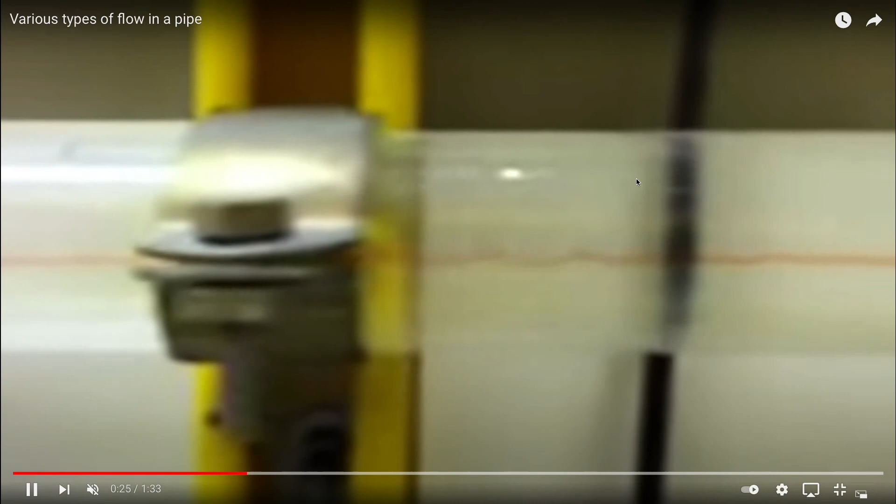When you increase the flow velocity and it starts going turbulent, you see these eddies develop, then it would be 0 right at the edge, but as you go a very small amount in from the edge, it would be the average velocity of the pipe, sometimes going backwards. Because if you have turbulent eddies, a portion of the eddy is macroscopically going backwards and some of it's going forwards at the top. So this is the behavior you're looking at.

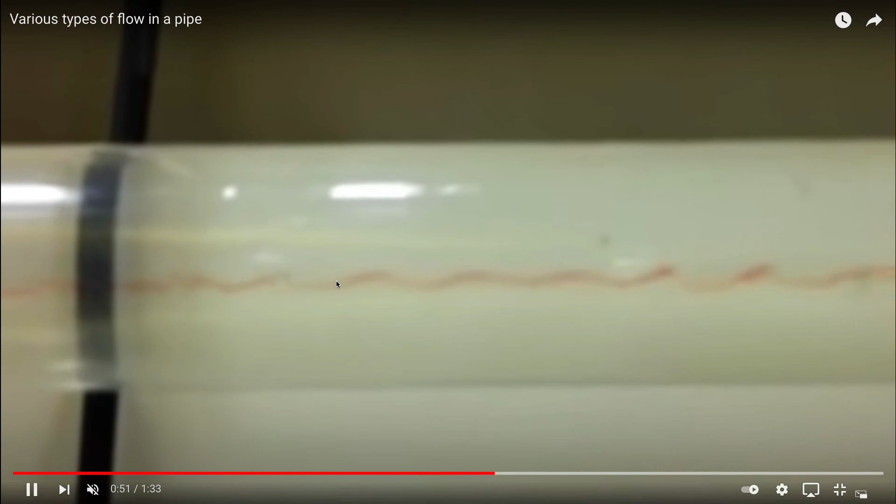The expression that we have, 64 over Reynolds number, is applicable only to the behavior you see at low flow velocities, which is this. Once it transitions to becoming turbulent, it's no longer given by that, and we have to figure out exactly how to do that.

The way you do it would be to apply a pressure upstream, know what your fluid viscosity is, know what your fluid density is, measure the velocity that comes out, and you'd plot it on the Moody chart in terms of your measurements.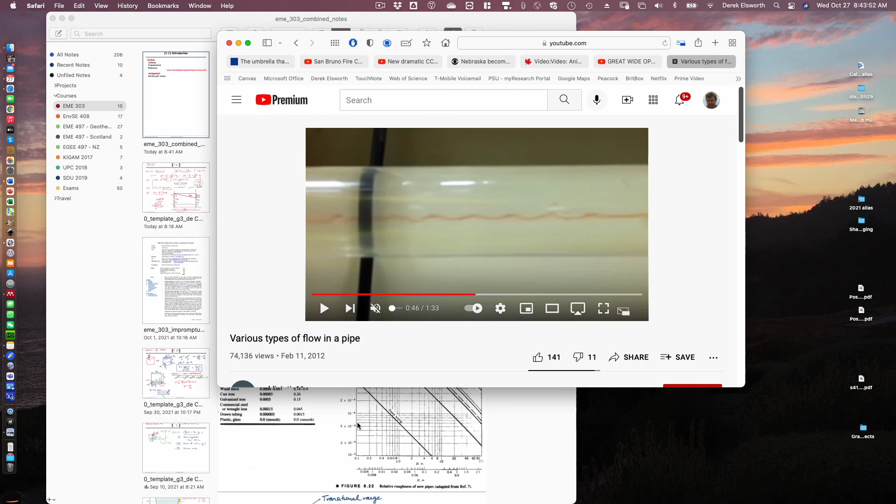You'd apply a pressure, you'd measure a velocity, and as you increase the pressure, you get a series of different velocities out of it. And if you plotted those data, you'd end up with a chart that looks like the one we've seen.

So I'll get rid of this. You'd end up with a chart that looks exactly like this. So you take a measurement at a low flow velocity, low pressure would give you a low flow velocity. You take another measurement where you increase the pressure. You take another measurement where you increase the pressure, and at some stage you'd skip over to this curve here.

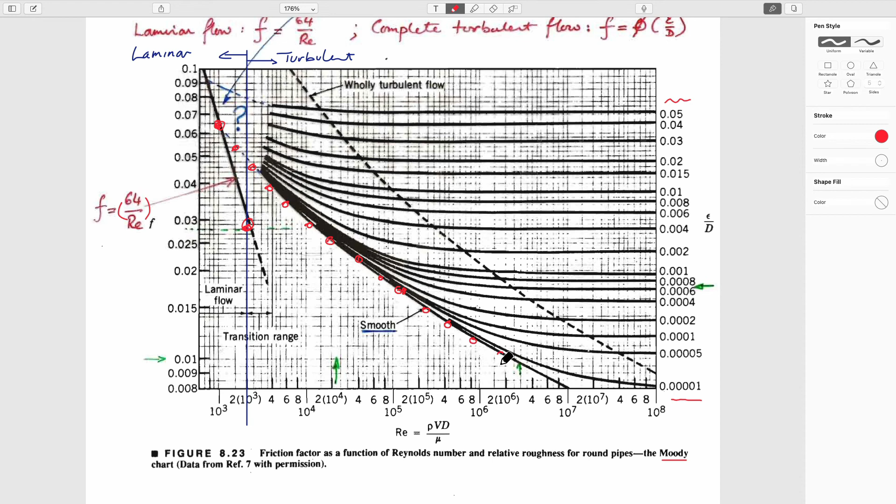So actually you could think of your individual experiments at different pressures and increasing flow velocities. And if it was an infinitely smooth pipe, you'd keep on going down here. These would be the measurements you'd make. I guess that's probably pretty smooth, that pipe we just saw.

It's plexiglass. But if your pipe had some roughness on the inside, then you'd skip down here, and then you'd skip across on one of these curves.

And you'd find that when you got to being very high flow rates, flow velocities, the magnitude of this friction coefficient reaches a constant, and it should. If you can measure it on your model, then you'd know that the data you have for this curve represents a certain friction, a certain roughness, and therefore you have it. So that's kind of it.

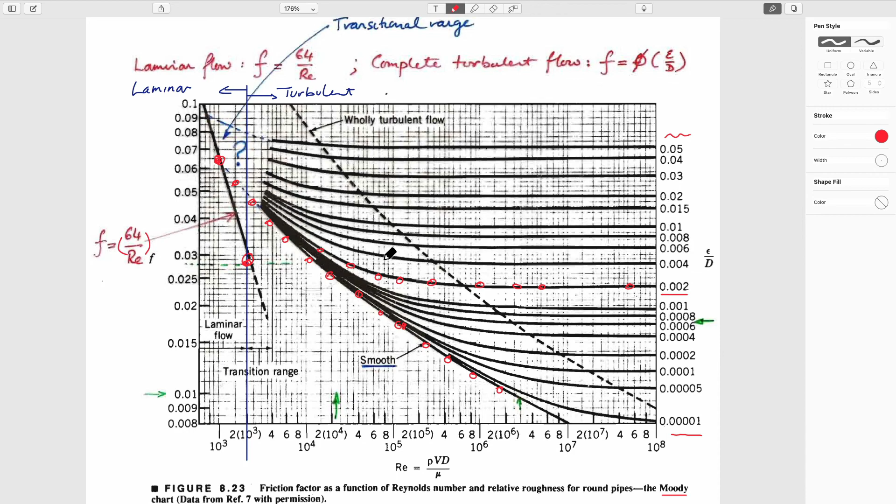So that's really what the essence of pipe flow is. That's, I guess, how you'd construct these charts. We're not so interested in constructing these charts, but we're interested in using them, so we're interested in being able to do the first part of this.

We'd like to draw our system. We'd like to realize whether we have a pump in here that's providing head or not. If there's no pump head in the system, then the pressure drop, head drop between upstream and downstream has to be made up for by the frictional losses in this pipe.

And if we write Bernoulli between locations 3 and 4, we end up defining that they're equivalent, right?

The pressure drop between 3 and 4, if it's just a static column of water in each case, is exactly equal to the elevation drop between those two surfaces. And so this factor applies.

We want to know what this value is, or if we apply this value, we want to know what the velocity is. If we know this in our system, we know the length of our pipe, we know the diameter of the pipe, we know how rough it is, so we might know the friction factor, then we can figure out the velocity.

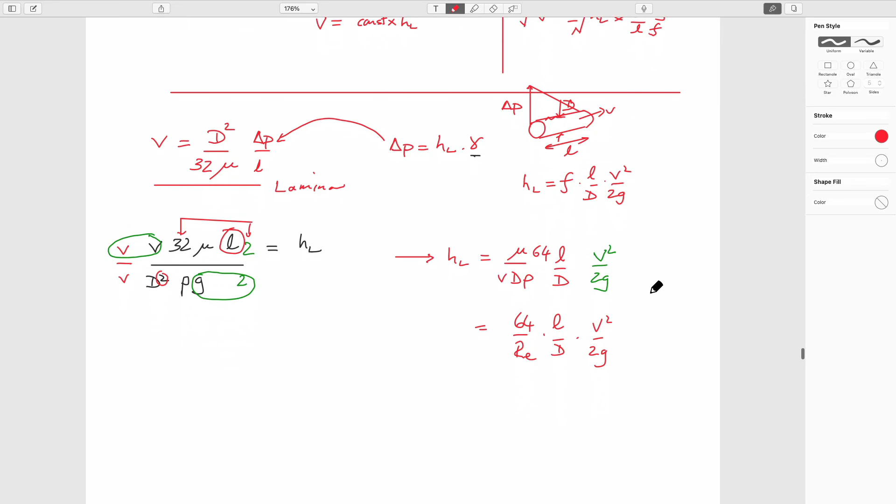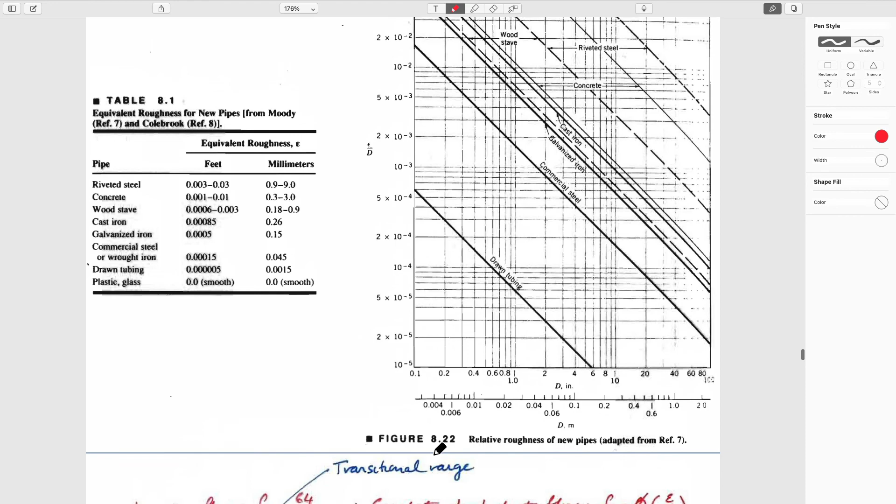The only trick is that sometimes the friction factor is a function of the Reynolds number, which is a function of the velocity. So we can't always solve it in one step. The mechanisms that differ between laminar and turbulent flow, we have to mess around with a little bit and understand that.

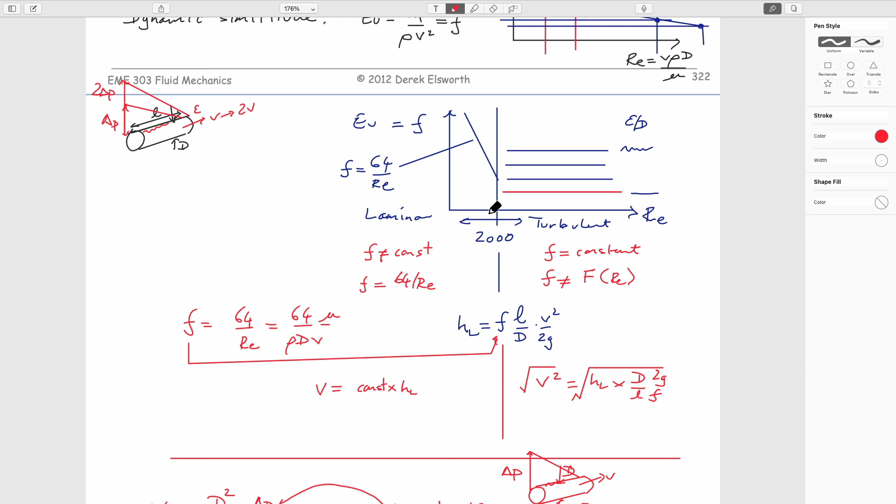So we'll talk about some ultimately different quote-unquote types of problems: Type 1, Type 2, and Type 3 problems. Type 1 is the easiest.

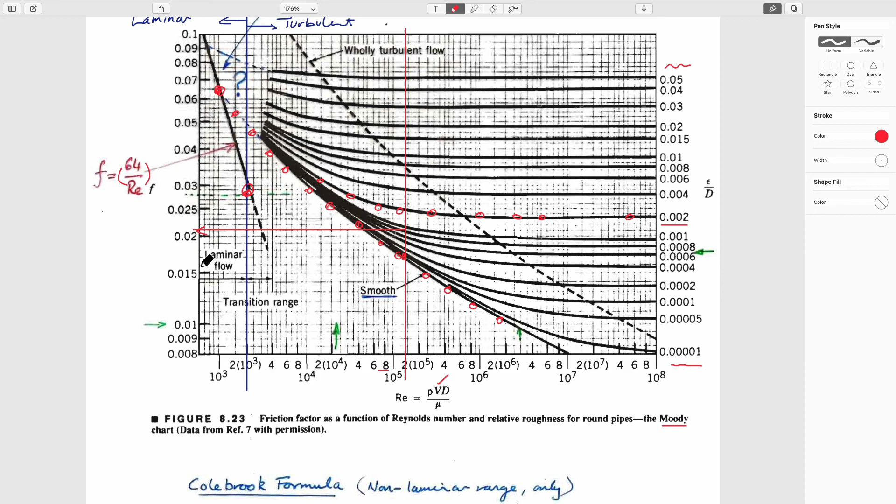Type 1 is where you're told that the velocity in the pipe is equal to 1 meter a second, and you have to calculate the head loss. It's easiest because if you know the velocity, you absolutely know uniquely what the friction factor is, since you have a Reynolds number that you know because you know velocity. Given the geometry of the pipe, you absolutely know what the friction factor is, and you can solve it in one step.

But if you want to figure out exactly what the diameter of the pipe is to give you a particular flow rate with a given head loss, then you don't know what the flow velocity is, and so you have to iterate to a solution. It just gets to be a bit more messy, but ultimately solvable.

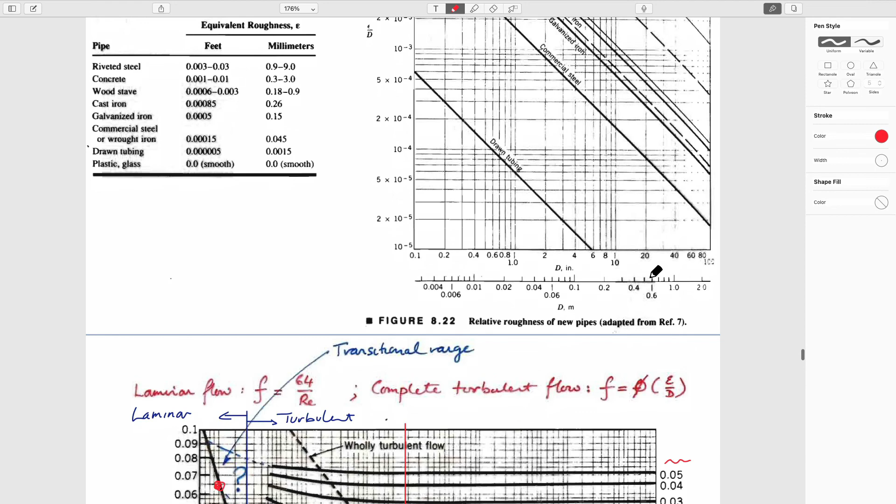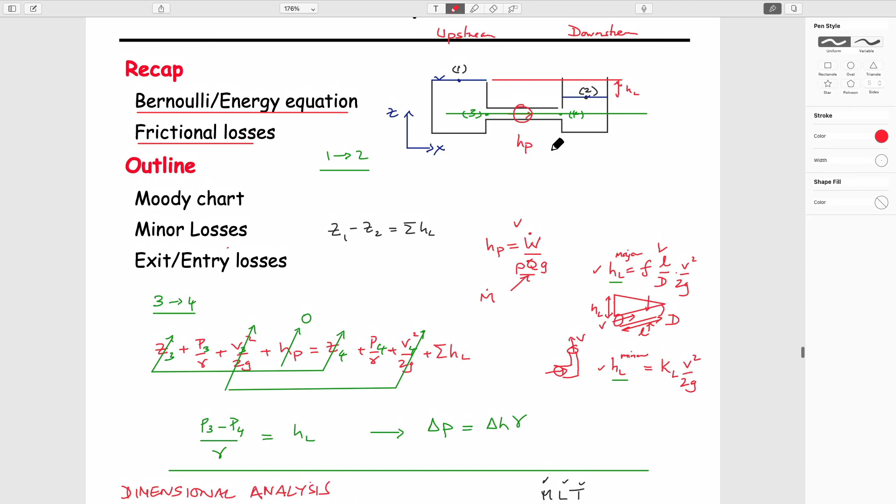From now on we'll talk about using Moody charts. There are two things: major losses, which are due to the drag in the pipe, which we've spent most of today talking about, and minor losses, so that if you have a bend in your pipe, or multiple bends as it goes down, you just have to add these individual losses. We can calculate those losses as a function of the kind of pipe we have.

Not surprisingly, this is just defining the relative roughness as a function of diameter of pipe and the type of pipe, nothing more than that. So for a pipe with a given roughness, as a function of diameter, you'd expect the relative roughness to scale. It's just multiplying. This is just a normal graph to define those, not particularly interesting.

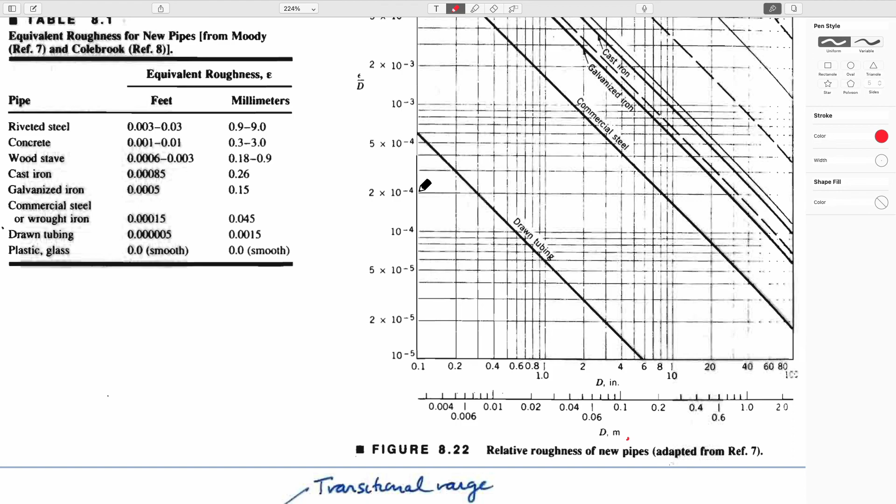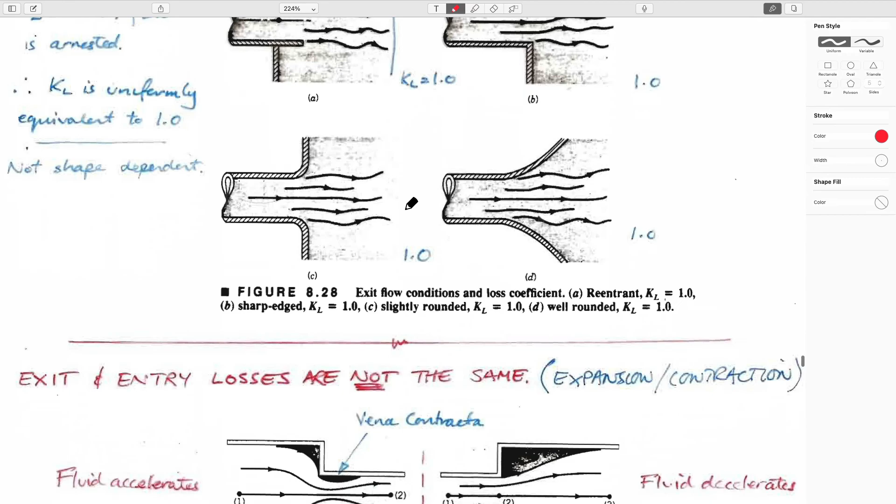So what we'll do next time is talk about using these to solve problems, and we're ultimately moving towards a table that talks about type 1, type 2, and type 3 problems.

The only issue is that the easiest problem to solve is if we have a defined velocity: we know the Reynolds number, we know the roughness, we can solve for the head loss in one step. If we want to dimension pipes for a given velocity or capacity and a given head loss, then we have to assume an initial velocity, check if it's right, check if it's the right Reynolds number, see what the friction factor is for that Reynolds number, and then iterate between them. So that's it, we'll do that coming on from here.

Questions? Yes? Would you suggest that we find one of those many graphs we have?